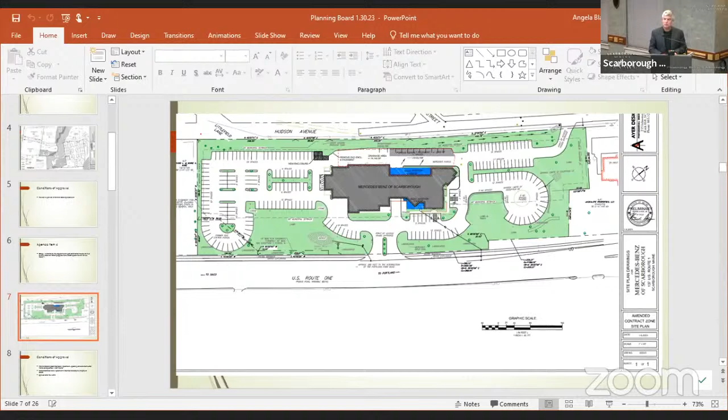This item is available for public comment. Is there any member of the public that would care to comment? Any hands raised?

All right, members of the board, any questions, any comments? Mr. Meinking: there's some administrative tying up that needs to be done in terms of dating and that sort of thing. I certainly don't have any concerns about what they're planning to do. It's been before us before—actually several times in several different iterations. I hope this is the one you move forward with and I don't have to do any more homework. That's it, Madam Chair, thank you.

Any other board comments? Jim: Madam Chair, I concur with Mr. Meinking. The applicant has addressed some of the issues we discussed last time, and the remaining issues are administrative that I think the town can handle without having to come back before us, especially since we're talking about changing dates and minor points on the drawing that don't impact the scope.

Thank you, anybody else? Noah: My apologies if this has already been covered in previous meetings. It well may have, but could you tell us briefly about the pavers you're going to be using—the water permeable asphalt or pavers? What is the product, and has it been used here in Maine previously?

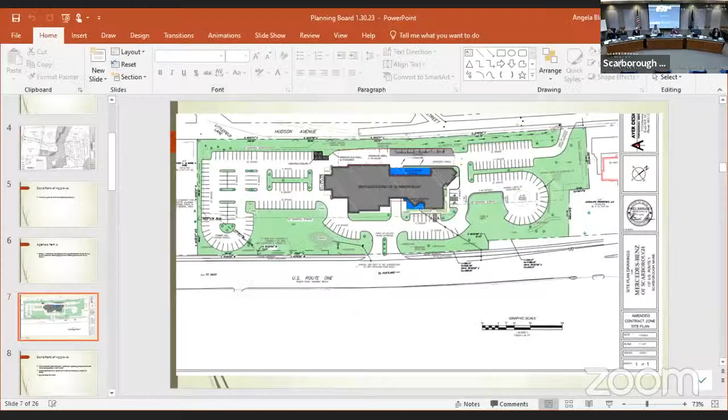I move to approve the project titled Mercedes of Scarborough, proposed by Group 1 Automotive, Inc., as depicted on the plan set prepared by Ayer Design Group dated 1/6/23, with the following findings and conditions. Findings: the proposal amends an existing site plan to construct two building additions, one in the rear totaling 1,745 square feet, and another squaring off the front totaling 490 square feet. The additions are proposed for additional showroom, customer, and office space.

Conditions: prior to recording the contract zoning agreement, the applicant shall: A, provide updated plan sets and stormwater memo as requested in the 1/30/23 staff memo. B, address planning board comments as discussed in the 1/30/23 planning board meeting; this shall be reviewed by the planning department. Two, the applicant shall record the contract zoning agreement in the registry of deeds by March 1st, 2023; this shall be reviewed by the planning department. Three, the additions shall have sprinkler and fire alarm systems extended to provide service; this shall be reviewed by the fire department.

Is there a second? I'll second. Thank you, seconded by Jim Hebert. Doreen, call the roll please. Jim Hebert, aye. Rachel Henriksen, yes. Rick Meinking, yes. Roger Beeley, yes. Glad, yes. Measure passes.

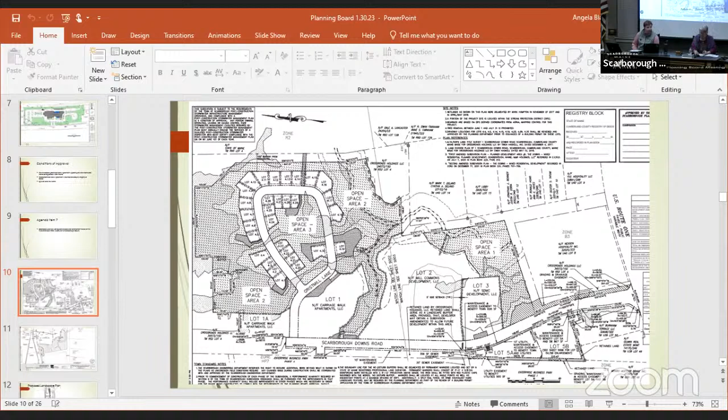Thank you. And for Crossroads, Mr. Bacon. Good evening, Dan Bacon here with Crossroads Holdings in Scarborough Downs. As introduced already, this is an amendment to a landscaping plan approved a couple years ago. The project implemented the majority of the landscaping as you're entering the Downs on the right-hand side. The left-hand side landscaping hadn't been planted because we knew we'd be widening Scarborough Downs Road's exit from the project.

So the traffic movement permit came about as we were completing this end of the project, so we held off on putting plantings in to only take them out. This plan updates what was approved, and it corresponds with the lanes we're adding exiting Scarborough Downs Road. It also corresponds with changes to the radiuses. The two corners coming in and out of the project currently have those slip lanes, or individual lanes for right-in or right-out. Those are coming out to make the intersection tighter, so you slow more as you enter or leave the project.

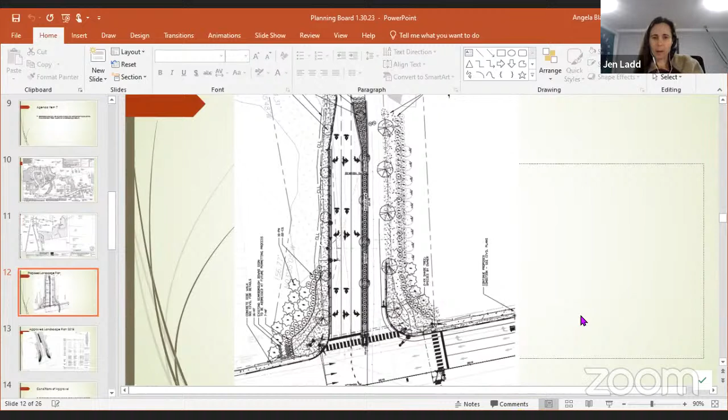Okay, thanks. And again, I know there was a staff comment about the offsite plans not being included in the submission, so maybe this is a question more relevant for that, but I'm curious if there's any sort of advanced inclusion coming for the signal upgrades at this intersection, such that bike signals might be an option down the road, or if that's not being factored in at this point.

I don't know how to answer that question. As far as advanced work on the actual traffic signal, maybe we've talked about this in the past, Angela—you know more than I in terms of the adaptive system. Is that something that's enabled? Angela, maybe you can handle this, please.

Sure. This whole corridor is going to be upgraded with adaptive traffic signal as part of the Downs offsite TMP work. My understanding—and it's funny, Jen's asking because I would probably rely on her—is that with the adaptive traffic signal, we're talking about upgrading the detection, and there is opportunity to adjust that detection to accommodate cyclists as part of that.

As she mentioned, you're sharing lanes coming out of just the Downs, and in order to detect cyclists, I think some upgrade would be needed with the cameras or adjustment, but that is something this system would be able to easily accommodate in the future. Or we could look at it as we're implementing it—when we start tweaking, part of the system starts learning, and we can adjust those detection zones and fine tune that too. If that's the planning board's wishes, we can put that in there, trying to adjust for cyclists.

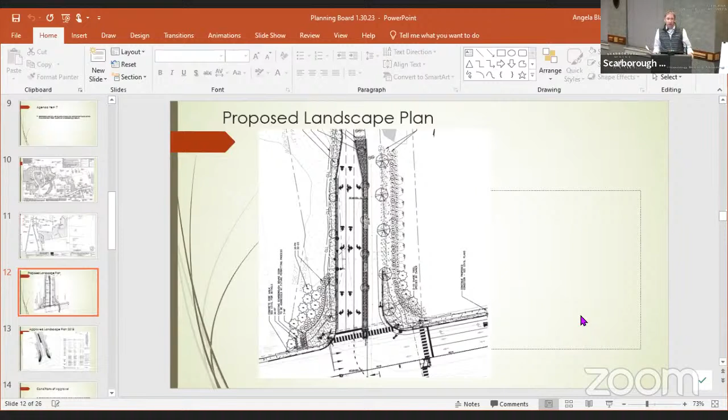We're pleased to comply with that condition and work to become increasingly native. But we also want to correspond with what's planted across the street, so we can work with Eric closely on selecting, finding that middle ground. Happy to do that.

Thank you. Any other questions from the board? None? Therefore, I have a draft motion, Scarborough Downs Third Amendment Phase 1 subdivision amendment review.

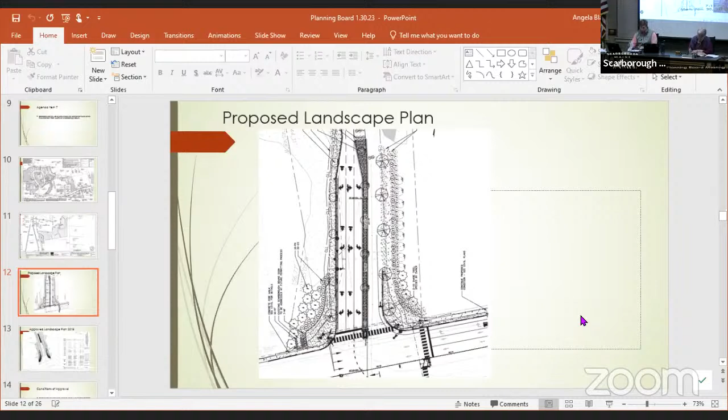I move to approve the project titled Plan Development Area 1 amended subdivision, proposed by Crossroads Holdings LLC, as depicted on the plan set prepared by Gorrill Palmer, dated 11/22/21, with the following findings and conditions. Findings: the proposal would constitute the third amendment to the Phase 1 subdivision at the Downs. The project would widen the right-of-way along Scarborough Downs Road and revise landscaping areas to accommodate required Maine DOT TMP improvements in this area.

Conditions: 1. Prior to release of the signed subdivision plan, the applicant shall: A, confirm with the town engineer that the designs for the off-site TMP improvements match the subdivision plan; B, address planning board comments as discussed in the 1/30/23 meeting.

Is there a second? Second from Roger Beeley. Doreen, call the roll, please. Rachel Henriksen, yes. Rick Meinking, yes. Roger Beeley, yes. Jennifer Ladd, no. And Jim Hebert, yes. Thank you. Motion passes.

Item number 8, Aaron Converse requests a sketch plan review for construction of a 126-room hotel located at 83 Mussey Road. The property is further identified as Assessors Map R55, Lot 17.

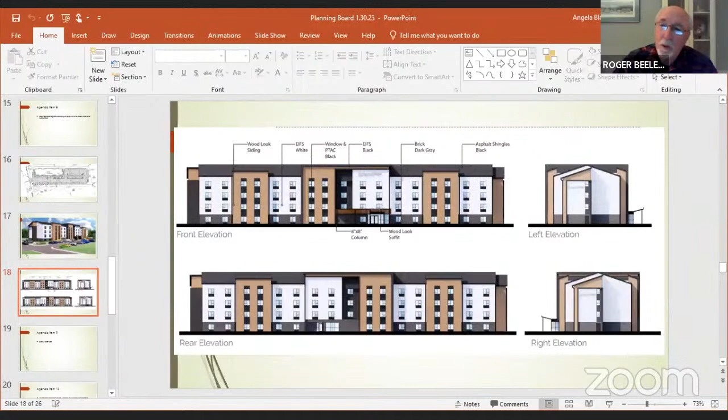And assuming you could, can I assume then that you would move the building location? Roger, that's hard to answer right now. I want to make sure I have everything dialed in before I answer that. Okay, maybe everything's right, maybe I don't know. Yeah, but we could definitely talk to who we need to talk to and get in front of whoever we need to get in front of to make sure this thing works.

We really want to be in the town of Scarborough, so whatever we can do to work together is what our goals are.

Okay, my last question is on your operations. Is this a long-term stay facility, or is this basically just overnight people? Both, we accommodate both. We particularly go towards military, traveling nurses, displaced families for the longer stays, but then we also have your nightly people as well.

Okay, is this your first facility in Maine? In Maine, yes, we're working through one over in Syracuse, New York, but up in the Northeast there. Okay, that's all I have right now.

Again, I would just urge you to make every effort to deal with that access location. I appreciate that, thank you. Thank you, Jen? Yeah, thanks.

I, in return, think that's sort of a no-brainer to have that conversation with your abutter. In particular, I appreciate your team's approach to that. It seems like you're very willing to have that conversation, and I realize it takes two parties to negotiate, and so being forthright with that is going to work certainly in your favor.

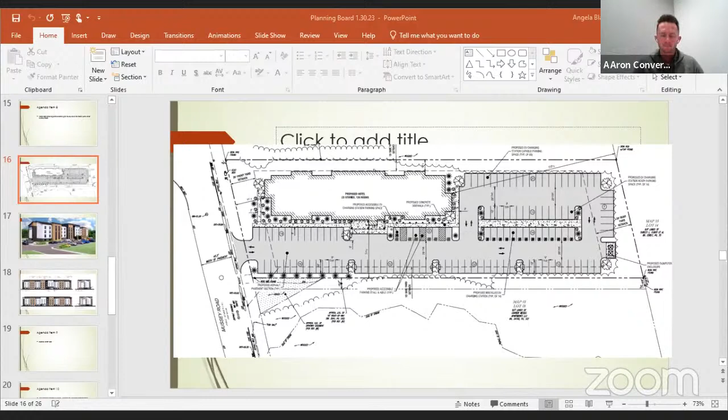So I'm just curious if you guys have considered this alternative. Considered it, looked at it? Yeah, I mean, yes and no. We like it, don't love it yet, but we would consider it and look at it here too, and we look at it everywhere we go. Thank you.

First of all, I want to say I really appreciate the discussion we've had, in which you indicate a willingness to work with us and with the staff. The staff we have are top notch, and if they suggest something to you strongly, I would advise you to really, really consider that.

We take their advice to us very seriously. They are the ones who are reviewing constantly all of the ordinances to ensure that what comes before us meets the ordinances. One of the things that Mr. Sanderson's memo highlighted was the suggestion that you take a look at the design standards.

So I took his advice and I took a look at the design standards as well. And there are some sections of the design standards that I think you need to take into consideration very, very carefully. So I'm going to read to you from a couple of the sections of the design standards under architecture, page 15 in our design standards.

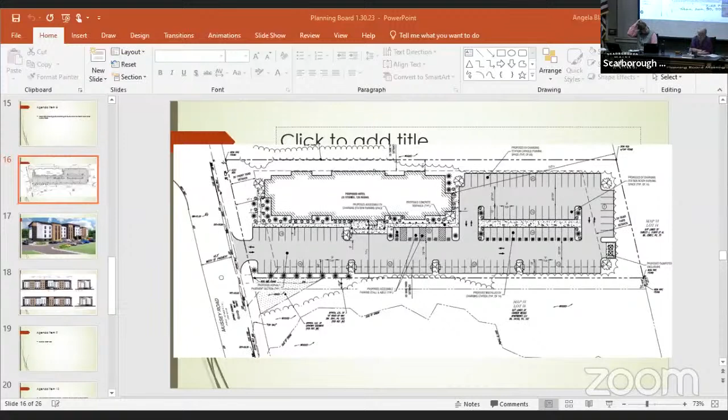We usually translate that into a requirement for a New England vernacular in terms of the construction. Also under design standards, franchise styles, architectural forms primarily derived from building styles from other regions of the country are prohibited. New England regional prototypes from national franchises are permitted provided they meet the design standards.

There is another section under the design standards, general principles, architecture, page 2 I think. New buildings shall be designed to fit the individual characteristics of their particular site. The architecture shall be influenced by traditional New England building forms and town-making patterns. And again, there talks about good neighborhoods and relationship to residential properties.

Now, while the properties on either side of you are listed as basically business, an apartment complex is in many respects residential. As one of my colleagues talked about the necessity for appropriate lighting going into places where people live, the apartments.

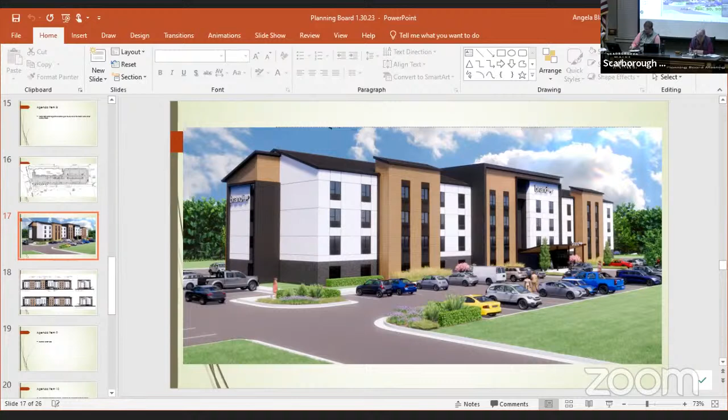On page, again, site planning 2, relationships to residential properties: the facades of buildings which abut or are visible from residential neighborhoods shall use forms, materials, and details which are residential in nature and appearance. Service areas, parking lots, outdoor storage yards, and other similar features shall avoid facing residential neighborhoods.

Now, you're probably not going to be able to change a parking lot all that much on this site. But one of the things that we do require, as Ms. Ladd discussed, is a gathering place and an appropriate facade on a building that welcomes people in, that gives them a place to sit, that gives them a place to meet. We're going to be looking for that, or certainly I'm going to be looking for that.

Also under architectural goals: good neighborhood buildings that thoughtfully consider scale, form, orientation, height, setback, massing, materials, and architectural features. Those are the goals. Buildings that are designed as permanent positive additions to the commercial district, constructed of high quality, long-lasting materials. We also talk in terms of site planning goals about quality development that respects the uniqueness of each property and reinforces Scarborough's sense of place and character. And we also talk about protection for abutting residential properties through sensitive site planning, buffering, and architectural design.

All of that is leading me to say that I have a problem with your architectural design. At this point, I cannot see the New England vernacular. I understand that you use a great deal of the Scandinavian influence with the last name of Hendrickson. I understand that. I like Scandinavian.